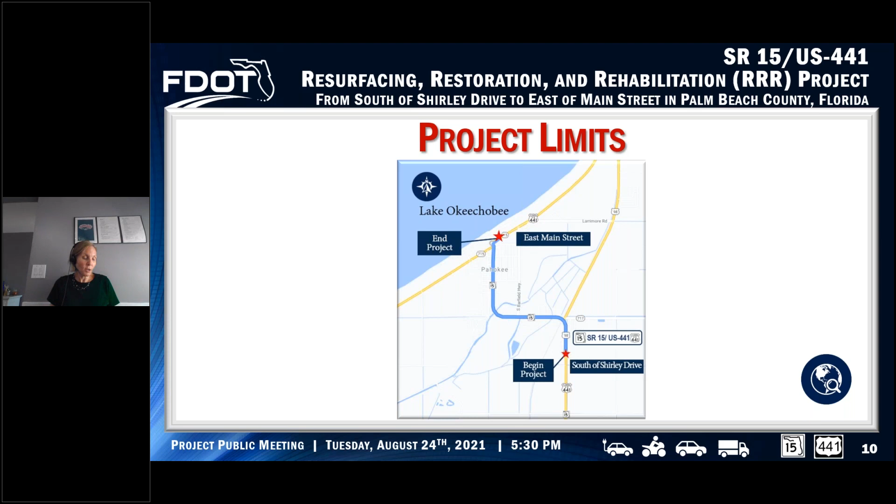Next slide, please. Slide 11. An overview of the proposed improvements include repaving the existing roadway, adding sidewalk on the west side of the road to provide a continuous sidewalk along the project length, improving bus stops, providing corridor lighting, and improving the existing lighting at Bacom Point Road or East First Street, signing and pavement marking improvements, and adding pedestrian crossing locations to provide connectivity in the area.

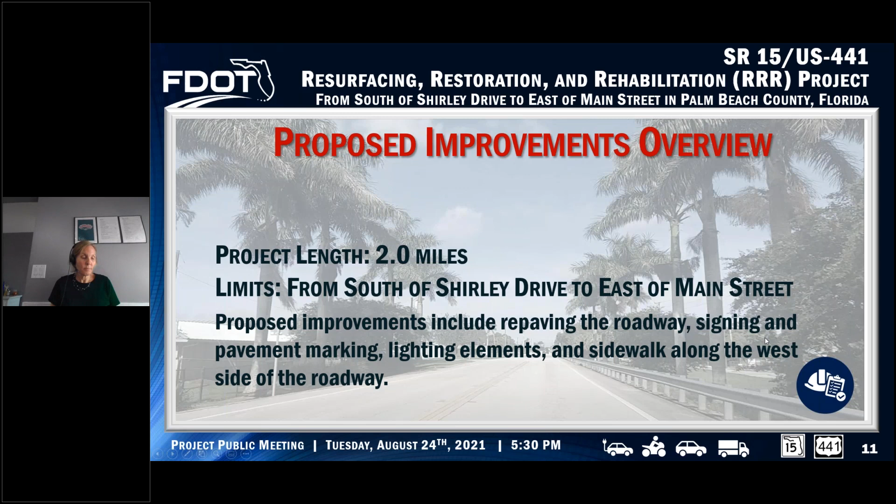Next slide, please. And again, the project improvements include repaving the existing facility. The existing roadway will be milled and resurfaced with new pavement. Concrete sidewalks will be added on the west side of the road to provide sidewalk continuity. The new sidewalk limits are from Shirley Drive to Dr. Martin Luther King Jr. Boulevard.

New pedestrian crossings are proposed at the intersections of Shirley Drive, Pahokee Drive, near the track store at State Market Road, at Barfield Highway, and at Dr. Martin Luther King Jr. Boulevard. The sidewalk will also cross over the railroad tracks near Market Road, and railroad pedestrian gates will be provided at the sidewalk.

Deficient guardrail will be replaced to meet the latest standards. Street lighting will be added along the roadway from Shirley Drive to Dr. Martin Luther King Jr. Boulevard, and upgrading the lighting at Bacom Point Road, East First Street intersection to enhance the lighting at that intersection. Next slide, please.

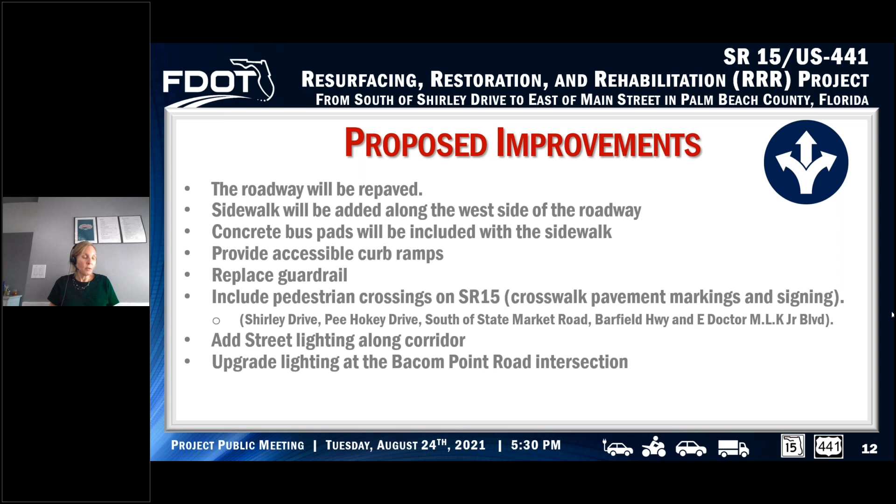This is slide number 13. So the next few slides will show the proposed improvements starting at the beginning of the project, which is just south of Shirley Drive. We've divided the project into 9 segments. And after we go through the 9 segments, we'll go over some specific areas in a little bit more detail.

So this is segment 1, which again starts just south of Shirley Drive and goes to just north of 87th Place North, kind of near the Pahokee Food Market. You'll see the sidewalk that's on the west side of the road, it's the new sidewalk. And you can see some green symbols, and those are proposed lighting that's going to be added to the project.

And there's going to be some bus stop improvements near 86th Street. You can see the little red circle kind of circling that area. And there's going to be a pedestrian crossing from Shirley Drive to the new sidewalk that's on the west side of the road. Next slide, please.

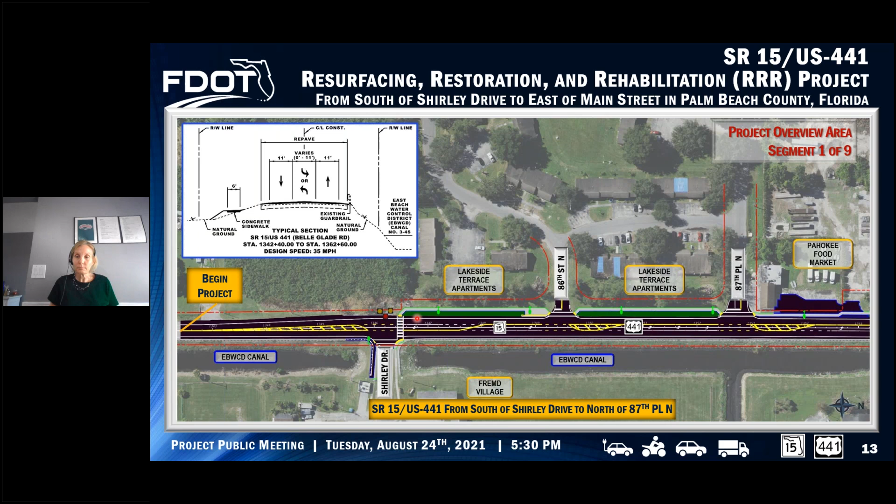Okay, so this is segment number 2, and this continues going north, and it starts just south of Pahokee Drive and goes over the railroad tracks just on the other side of State Market Road. And you can see the sidewalk that continues on the west side of the road and the lighting that's being added adjacent to the sidewalk.

There's also bus stop improvements at Pahokee Drive and also near the track store. And there is pedestrian crossing locations at Pahokee Drive and the track store as well. And at the railroad track crossing with the new sidewalk, there's going to be pedestrian railroad gates provided there. Next slide, please.

This is slide number 15. And this starts just on the other side of the railroad track, and then the roadway actually continues to the west in this area. And we're approaching the Padgett Island community near Padgett Circle. And again, you can see the sidewalk that continues along the roadway and new lighting that's proposed.

One thing I wanted to mention is that to provide the sidewalk crossings at the driveways, we will need to repave some of the driveway entrances and regrade to harmonize with the existing driveways. Next slide, please.

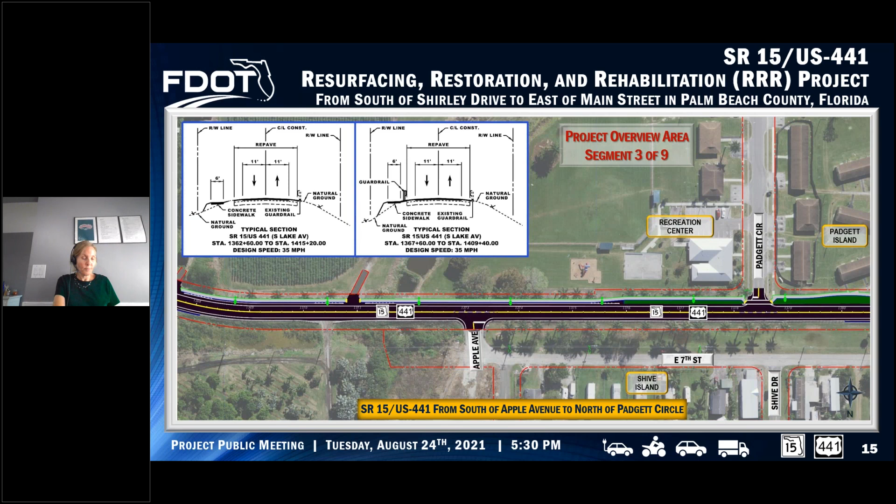Okay, this is segment number 4, and this is continuing along the Padgett Island area near Padgett Circle, and is approaching the Barfield Highway area. And we have the sidewalk that continues along the south side of the road. And there'll be some sidewalk connections at the Padgett Island development, some lighting that's proposed along that segment.

And then we're going to have a pedestrian crossing from our proposed sidewalk to the sidewalk that's being constructed as part of the Barfield Highway project. Next slide, please.

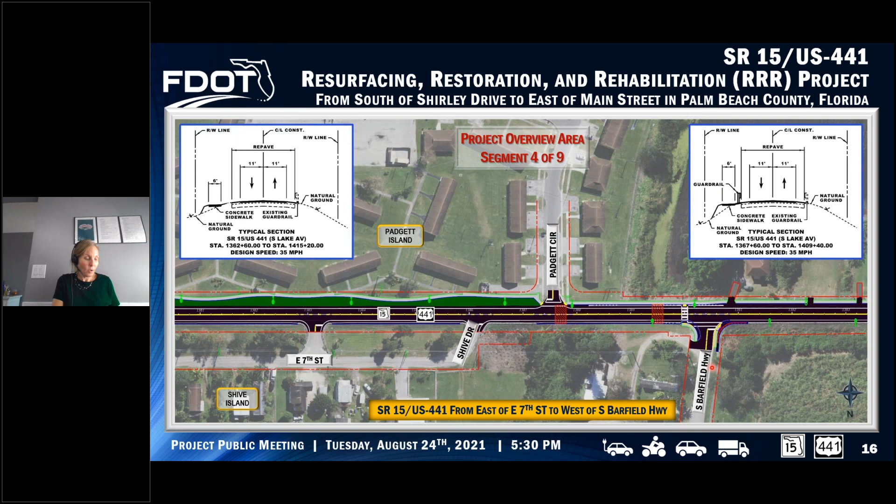Okay, this is segment number 5, and this is continuing.

We've left the Barfield Highway area, and we're approaching McClure Road, and you can see the sidewalk that is on the left side of the road, and the green light poles that are going to be added to provide lighting along this stretch of the roadway.

All right, next slide, please.

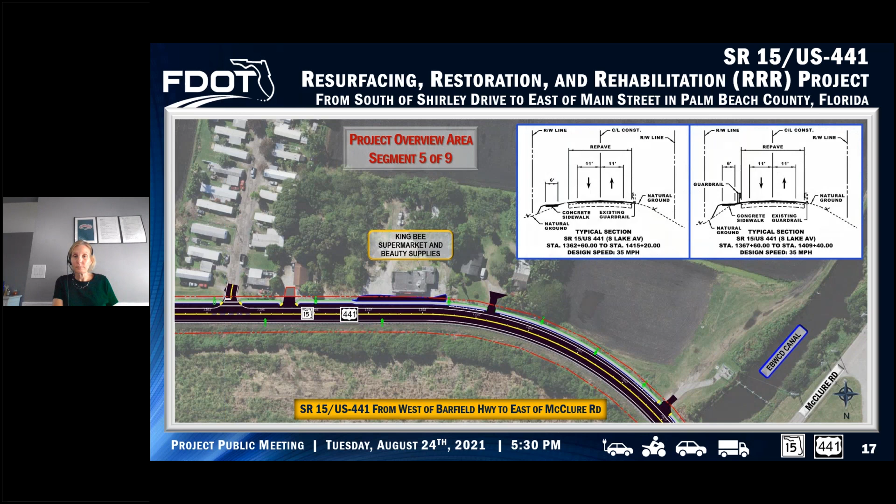This will be segment 6 of 9, leaving McClure Road and approaching Dr. Martin Luther King Jr. Boulevard. We're going to provide a sidewalk connection to the existing sidewalk just north of Dr. Martin Luther King Jr. Boulevard, with proposed lighting along that segment, and we're going to restripe the crosswalk just north of the boulevard to connect to East 5th Street.

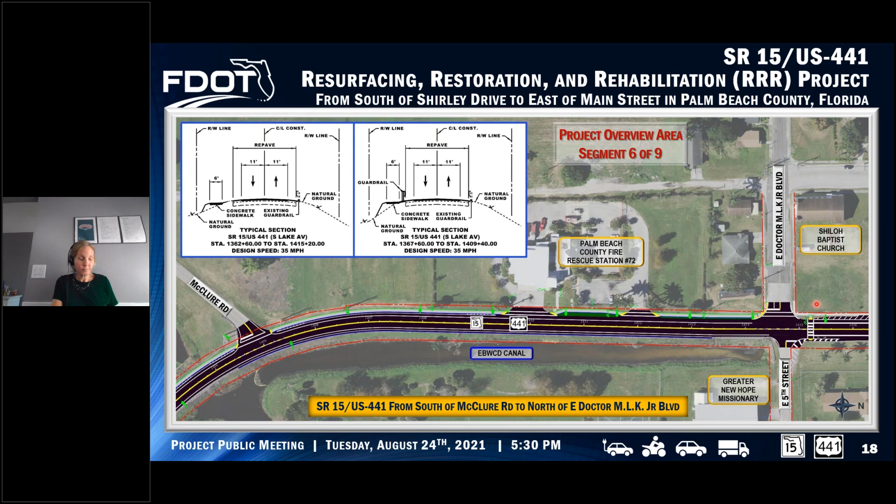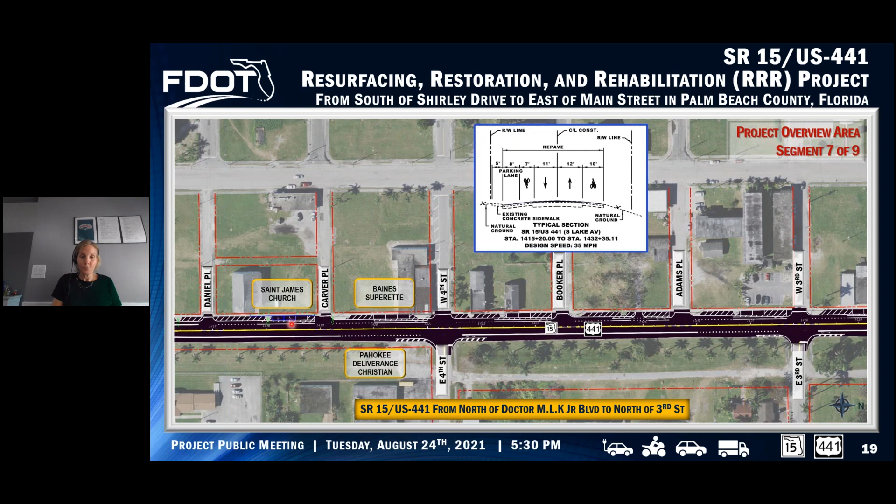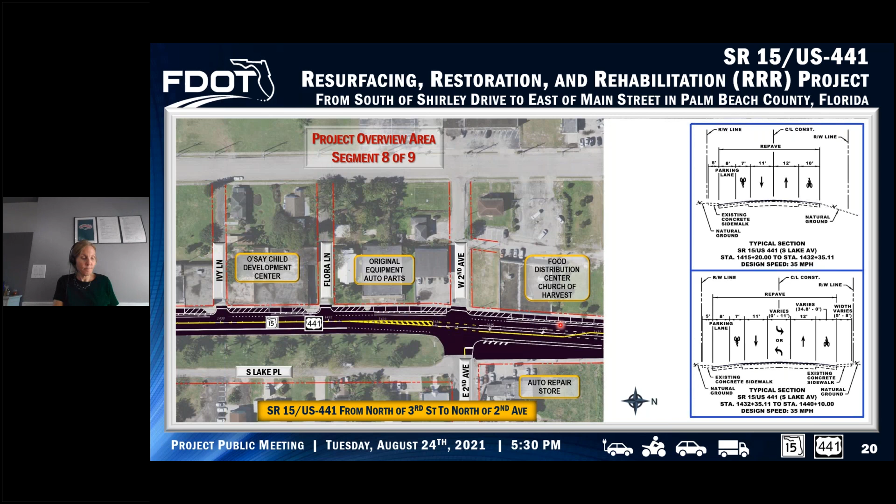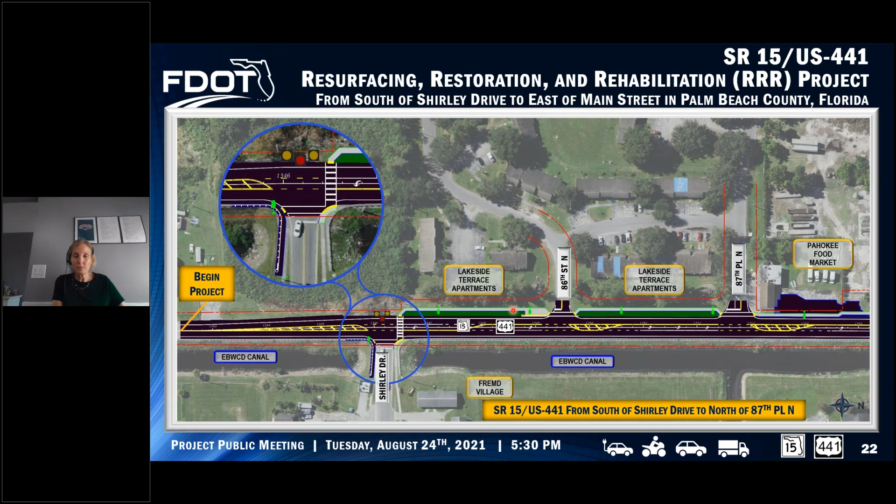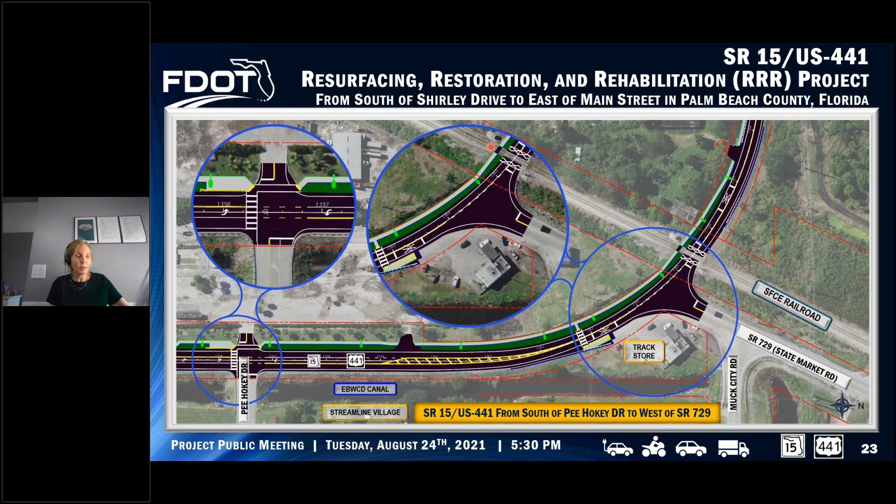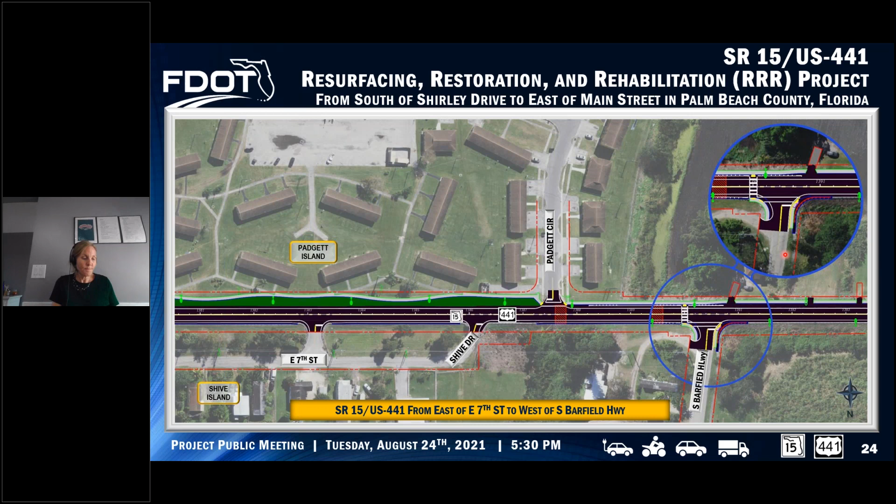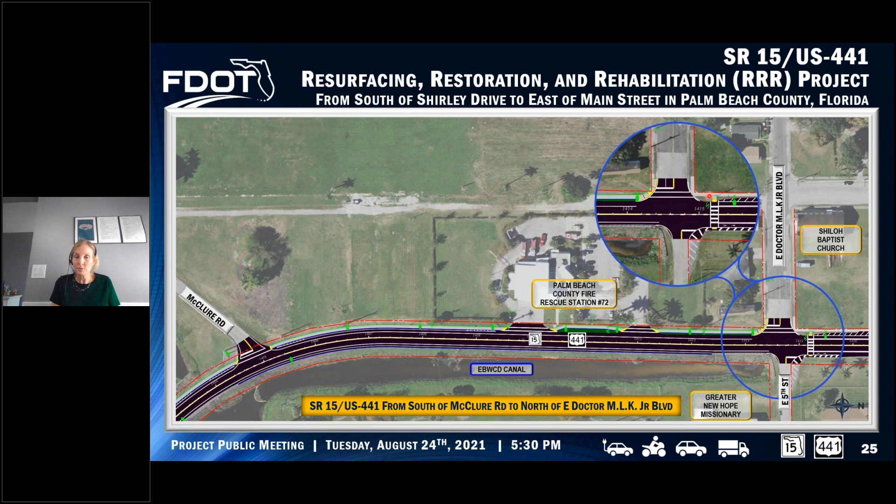And this is a blow-up showing the proposed improvements at East Dr. Martin Luther King Jr. Boulevard. We're going to be restriping that pedestrian crossing area, and you can see the sidewalk that'll be provided on the west side of the road to provide some sidewalk continuity through the area as well.

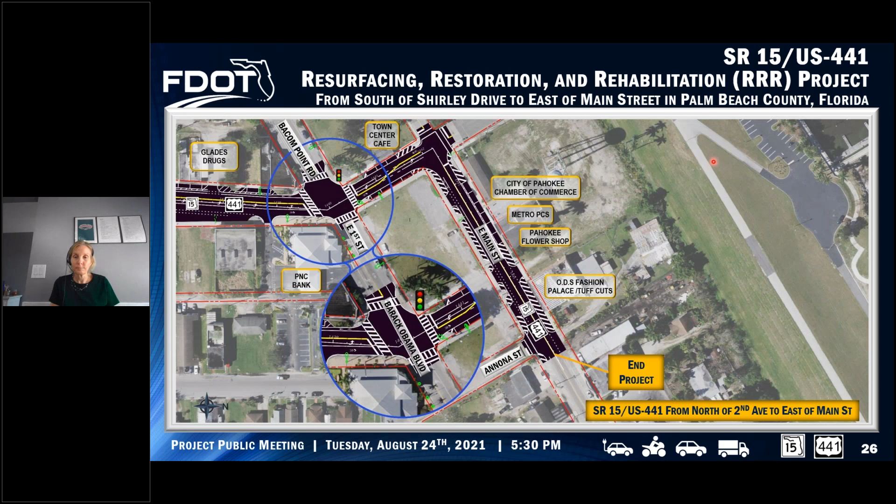Okay, this is a blow up showing the intersection of Bacom Point Road or East 1st Street. You can see the crosswalk striping that's going to be provided for pedestrians, and we're also going to do some lighting improvements at the intersection to make the pedestrians more visible as they're utilizing the crosswalk in the area.

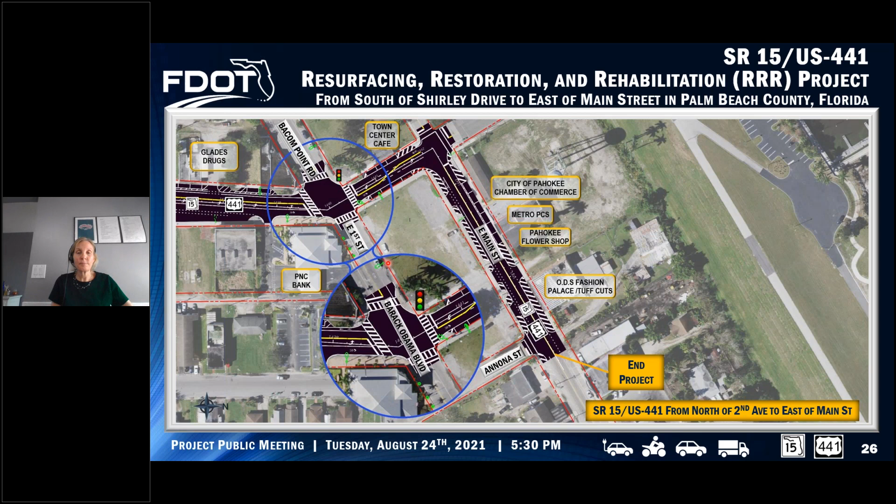This is concerning the construction impacts for the project. A temporary traffic control plan has been developed to minimize disruption to the traveling public, residents, businesses, and property owners. Construction will be done in phases to reduce the effects of construction on the community.

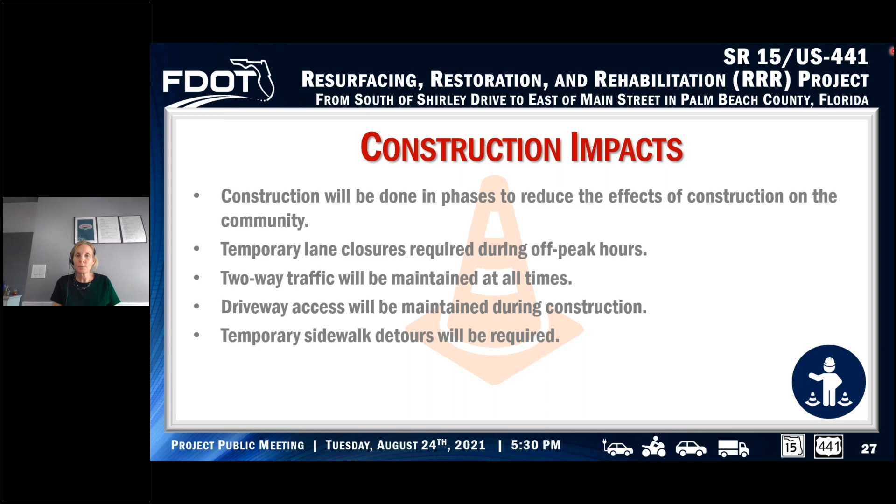Temporary lane closures will be required to repair portions of the roadway, and they will be performed during off-peak hours. Two-way traffic will be maintained at all times. Driveway access to businesses and residential developments will be maintained. Temporary sidewalk detours will be required at one location. Next slide, please.

This is slide number 28. At this time, the construction duration has not been finalized. However, we anticipate construction to take approximately 15 to 18 months, with construction starting in the summer of 2022 and being completed in the winter of 2023. The estimated construction cost is approximately $3.2 million.

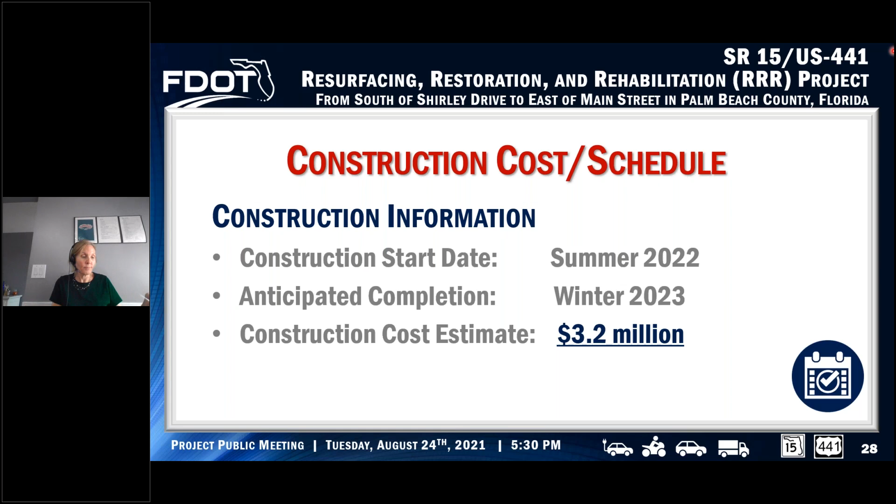The Florida Department of Highway Safety and Motor Vehicles, the FLHSMV, is committed to proactively protecting the safety of all motorists on our roads, educating everyone on safe driving practices, and always working to make a safer Florida.

So we encourage you to visit flhsmv.gov for safety tips on safe driving, hurricane season, emergency preparedness plans, pedestrian safety, and many more important topics and resources. The resources are also available in Spanish.